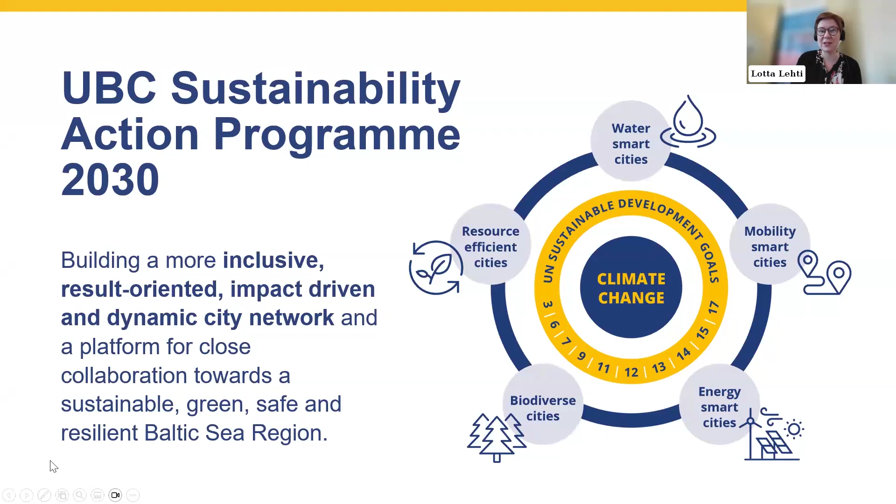Water protection is one of the top priorities identified in our Sustainability Action Programme. And it's with this priority in mind that we have built this project called EMPEREST. I will now tell you a bit about the project, which is the focus of our webinar. The aim of this project is to reduce the amount of organic micropollutants in the water cycle.

What we do is apply what we call a holistic approach to the elimination of micropollutants, especially PFAS. PFAS are the forever chemicals used in, for instance, Gore-Tex and Teflon. Our first activity strand focuses on mapping the current situation of PFAS pollution in the Baltic Sea and the catchment area.

The results are already available on our project website. Secondly, we are building a tool for cities and water utilities for identifying PFAS pollution hotspots in their area and to start mitigating the pollution.

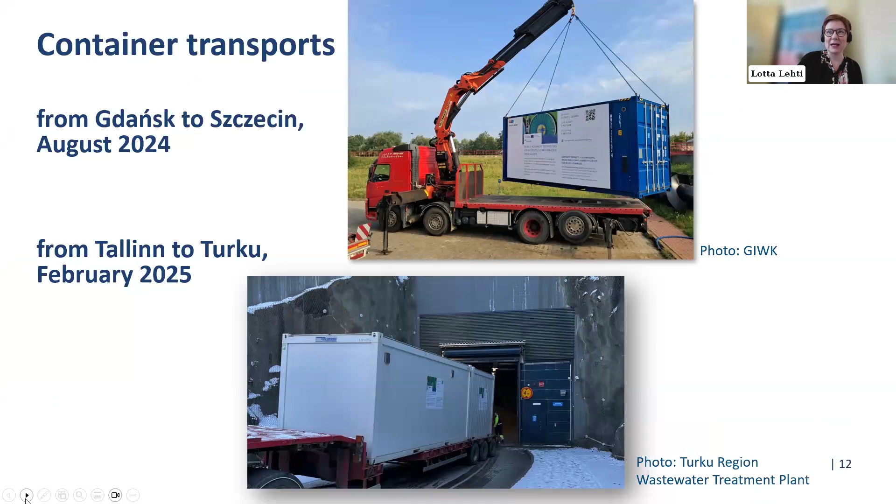And here are some photos of our mobile containers being transported. You will hear more about these containers and what they have inside them in the presentations that follow. So here is our agenda for today.

First, we have a keynote presentation from the Executive Secretary of Coalition Clean Baltic, Mikhail Durkin. Coalition Clean Baltic is a prominent non-governmental organization protecting the Baltic Sea and uniting different actors in the region. Thank you very much, Mikhail, for agreeing to set the scene for us. What are micropollutants? Why should we worry about them? And what's new on the European regulation level?

After Mikhail's presentation, we will hear from EMPEREST partners. Taavo, Tenno, Marlen, Taggu, Marek Swinarski and Piotr Miakoto will present the EMPEREST mobile containers, testing different wastewater treatment technologies. After that, Vanessa Ingold will tell us about the training materials that we have built in the project. And finally, Mariia Andreeva will tell about the solutions we offer and how you can participate.

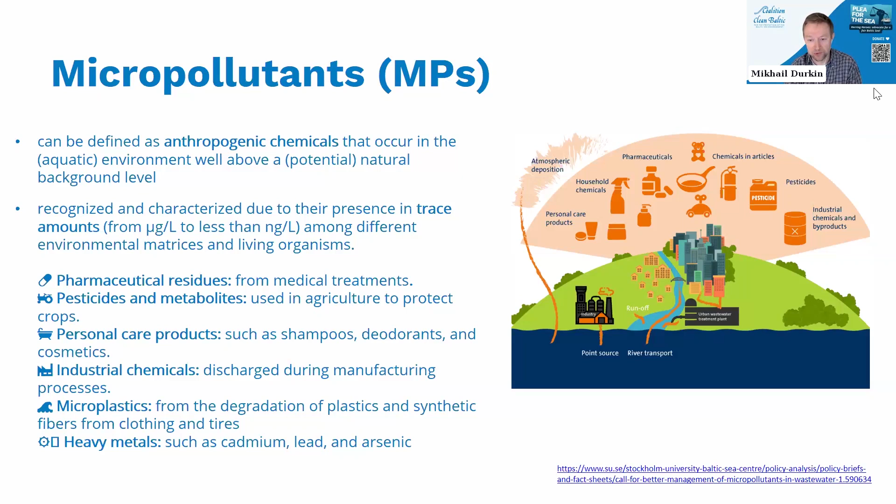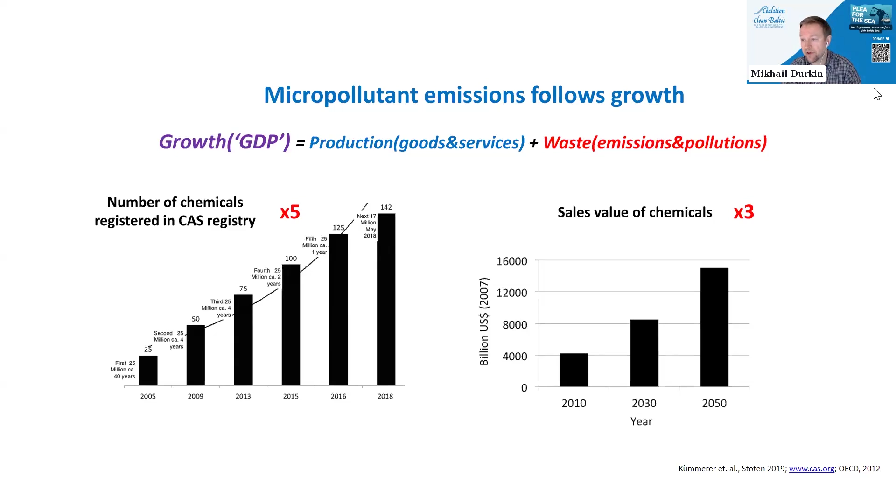What is also important to say, and that is quite an obvious fact, is that the further we develop our society, the more chemicals we have around us, and the more we actually have the problem of micropollutants. So micropollutants follow economic growth. This is demonstrated by these two diagrams: we see the constant increase in the number of chemicals registered in the CAS registry, and we see or foresee the sales value of chemicals being introduced every day, basically.

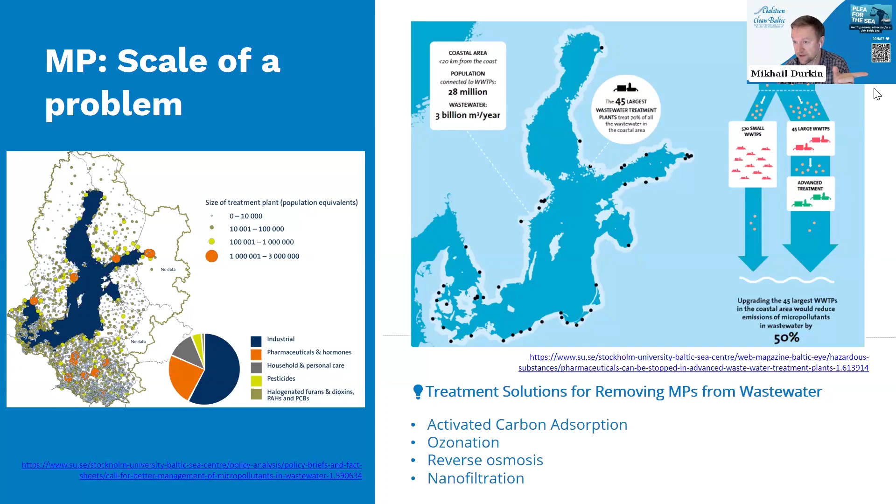Why is it important to address micropollutants? This is also very relevant and valuable piece of knowledge. I also call and draw your attention once again to the various knowledge, competences, and information available from Stockholm University Baltic Sea Center. I've linked here the Baltic Breakfast related to micropollutants in wastewater.

So why does it matter? In general, when you think about micropollutants and all those substances I referred to before, you can basically see several specific environmental impacts, like endocrine disruption, for example, because many micropollutants act as endocrine disruptors. These are not only hormones or pharmaceuticals being discharged, both human and veterinary, but also other kinds, especially persistent organic pollutants, and they affect reproduction and development in aquatic organisms.

The second issue is bioaccumulation. As we all know, many pollutants tend to accumulate in the food chain, endangering aquatic wildlife and predators, including humans, who are at the top of the food chain in many cases. Then the third one is acute and chronic toxicity. Toxic effects can be immediate or long-term, causing malformations, for example, diseases and mortality in sensitive species.

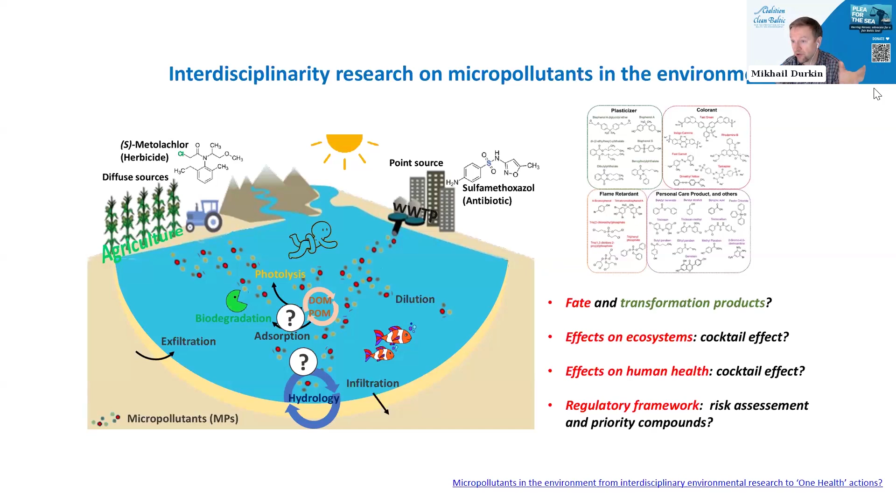Yeah, and then coming to the legislative advances and legislative development—many of you perhaps know and remember Silent Spring. That was a very important book, which was popular, well, I would say perhaps in the 60s, 70s, but also 80s and 90s. At least it was very well pronounced, being one of the bestsellers, generating people to think about environmental situation, environmental conditions, and the need to change.

And that was about pesticides, affecting birds—that an author suddenly realized that there are no singing birds outside. And that actually boomed and boosted the development in the environmental field, leading towards elaboration of respective environmental regulations.

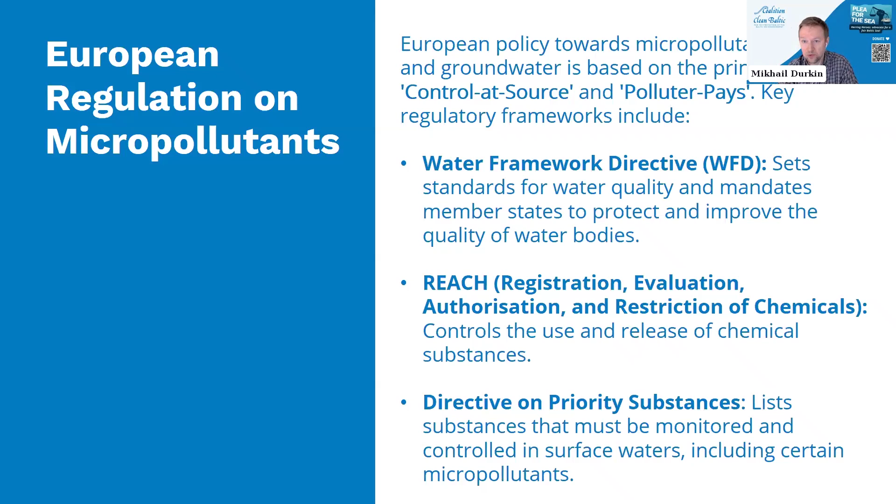But what is also important to remember is that in general, the EU legislation dealing with micropollutants is based on the principles of control at source and the polluter pays principle. And why it is important is that at any point, the polluter should be taken liable for what is discharged. This is also now taken on board in the new development of the Urban Wastewater Treatment Directive.

That is perhaps most important for this webinar, but in general for addressing not only traditional and conventional discharges of various contaminants from urban wastewater treatment plants and municipalities, but also micropollutants. And as many of you know, the directive was revised, updated, and released in November last year, so we have the link here. I will not talk about all of it.

I will only concentrate on what is in it regarding the micropollutants, and that is a very progressive part. In fact, that was very well awaited, and many of the actors dealing with the revision of the directive were coming with their feedback, consultations and asks to the Commission and European Council to really address micropollutants in the revision of the Urban Wastewater Treatment Directive.

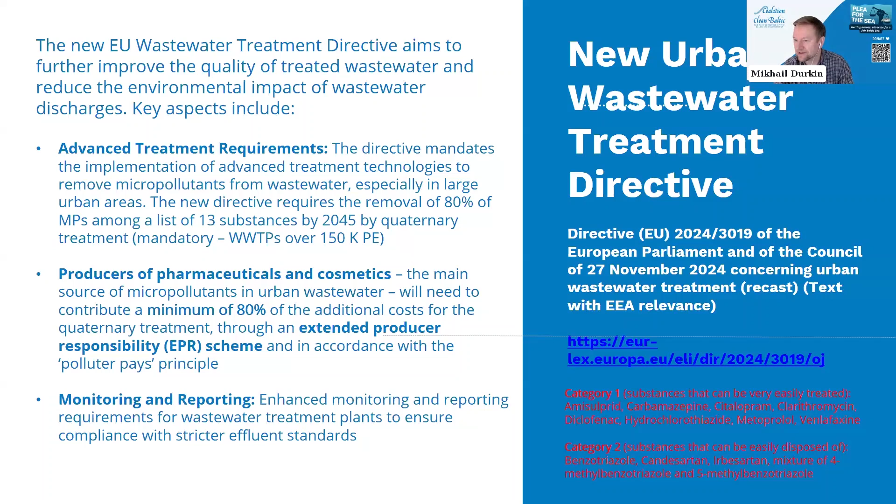I don't actually have time to speak about that, but what's also important to mention is that you do not necessarily need these sophisticated treatment technologies you'll hear about later in the day. What we as civil society have presented is that you can use constructed wetlands as some kind of, if not calling it quaternary treatment, at least an additional tertiary treatment. This is especially relevant for smaller wastewater treatment plants.

What we demonstrated in the study presented to HELCOM already, I think in 2020, is that with constructed wetlands you can also trap micropollutants quite effectively. But again, as I said, I don't have time to go through it.

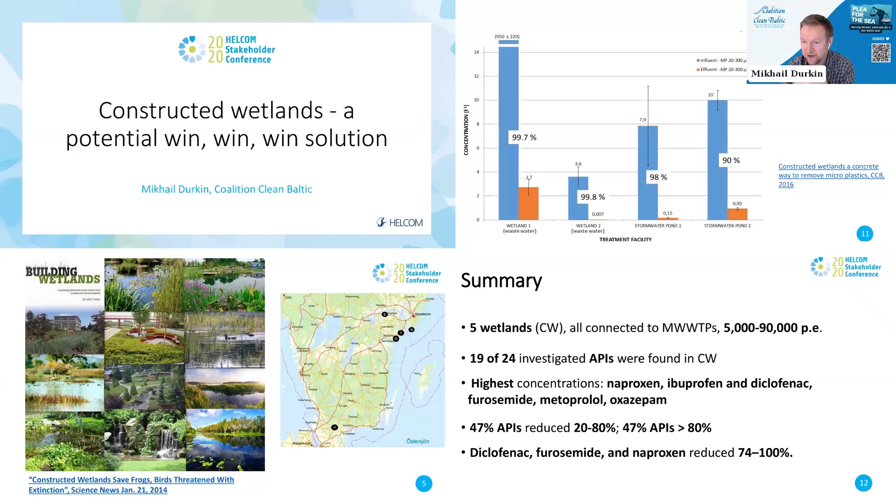Nevertheless, what's also important - we were talking about the Urban Wastewater Treatment Directive and others, and those are unfortunately still end-of-pipe solutions and technologies. What's important is to think about the whole cycle in order to actually address and reduce at source. This is presented in this diagram, which I've taken from another study, and that includes the whole circularity cycle.

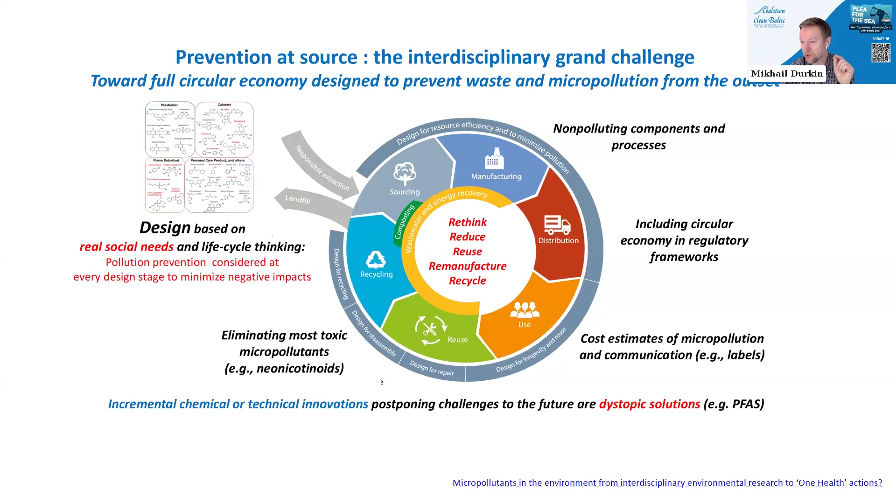So you have to rethink the design of specific articles, for example, to ensure hazardous substances are not included. You have to rethink the whole manufacturing, distribution and use cycle of it. You should, of course, remember designing for recycling and reuse as well. Again, it is important to look not only at the end of pipe, but also at the source. Thank you very much.

I tried to rush it through, and in case you have any questions, you can always reach me out. These are just a few of the hazardous substances projects we are working on and involved in from Coalition Clean Baltic. Thank you very much.

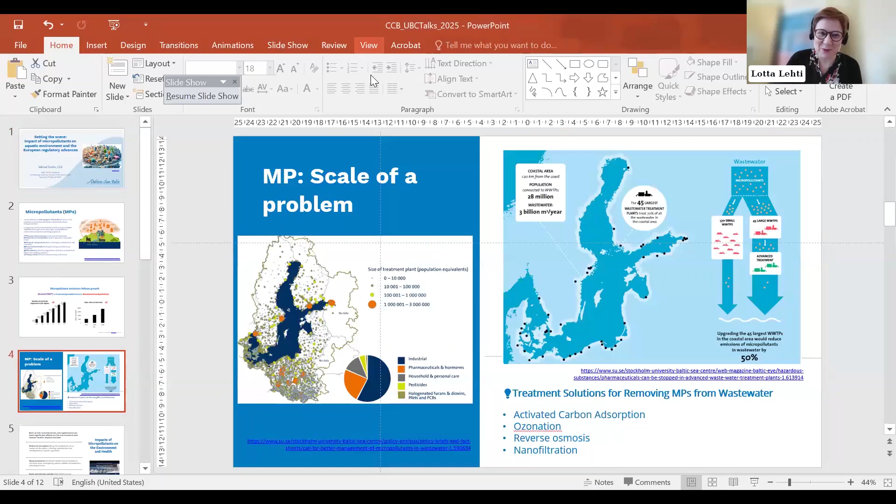You will find a very good snapshot of the situation with wastewater treatment plants in the region that was presented by Stockholm University Baltic Sea Center. We have around 45 large or relatively large wastewater treatment plants located within 20 kilometers coastal area of the Baltic Sea, and they are discharging 70% of all wastewaters to the Baltic Sea. So by addressing even just those 45, that would already improve the situation with the discharge of micropollutants into the Baltic straight away.

But there are plenty of smaller plants. In fact, the revised Urban Wastewater Treatment Directive requires mandatory quaternary treatment for plants over 150,000 population equivalents. The smaller plants, from 10,000 up to 150,000 PEs, are also required to look into introducing quaternary treatment, but based on risk assessment. Especially those located within areas sensitive to micropollutants will have to introduce quaternary treatment as well. I think it is by 2045, as it's a gradual process - 2036 is the previous step, when 65% of all plants should be upgraded, and 2045 is the ultimate deadline.

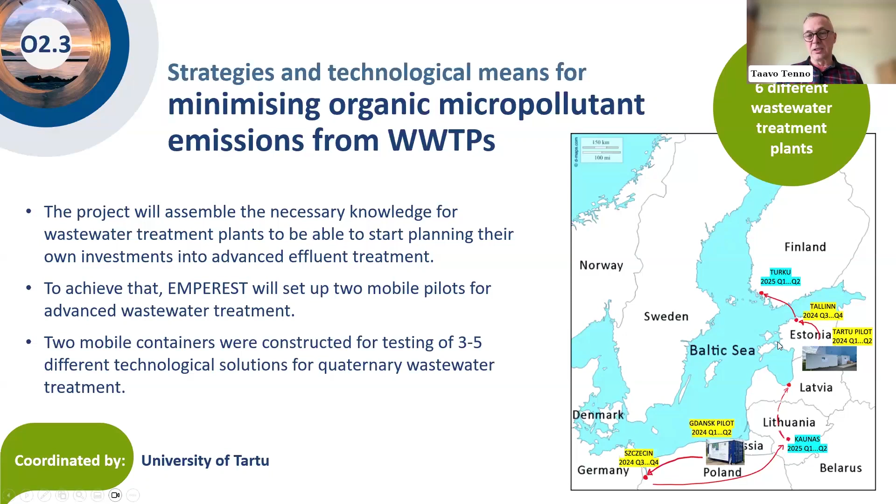That's the reason we are presenting preliminary results, a preliminary view of our project results. So now I'm introducing our speakers who are talking today.

I'm Taavo Tenno, from the university. From Tallinn, Marlen is talking about experiences, and I'll talk a little about the results of Tallinn and Tartu, the pilot plant created in Tartu. The other pilot plant, which was a little different, was constructed in Gdansk, and Marek from Gdansk Water Utilities is talking about the technology of this pilot plant and Gdansk results, and then Piotr will talk about tests done in Szczecin.

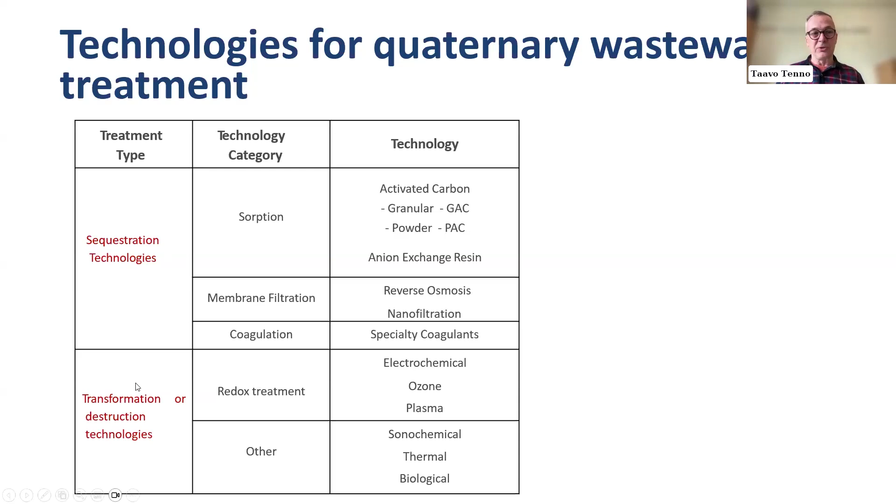So what technologies are there? For quaternary treatment, there are many different technologies proposed at different levels of reliability, categorized as sequestration technologies and transformation technologies. Among sorption technologies, the most prominent is activated carbon. We know activated carbon absorbs different micropollutants, and there are different types with different porosities and so on.

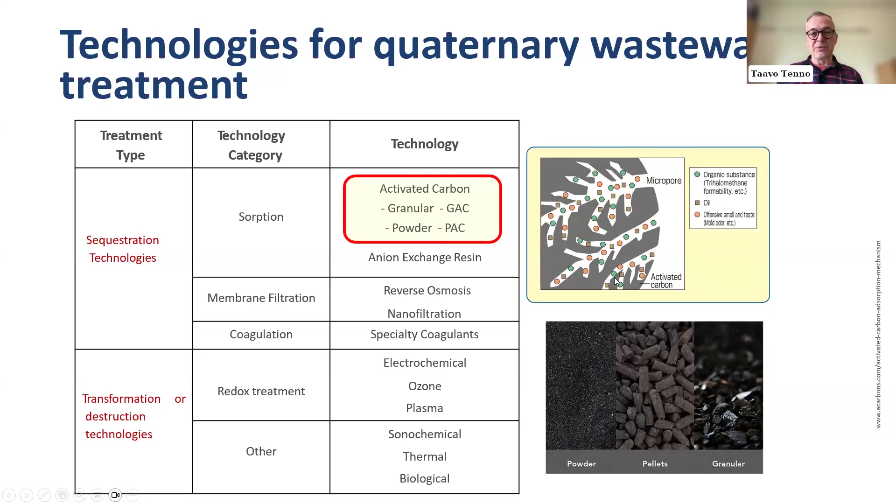In general, there are two different forms: granular activated carbon, which is a big size, normally used as a fixed bed, and a powdered version, which needs to be separated. The main idea is sorption, and it absorbs different chemicals including micropollutants. So finally we have activated carbon filled with those chemicals.

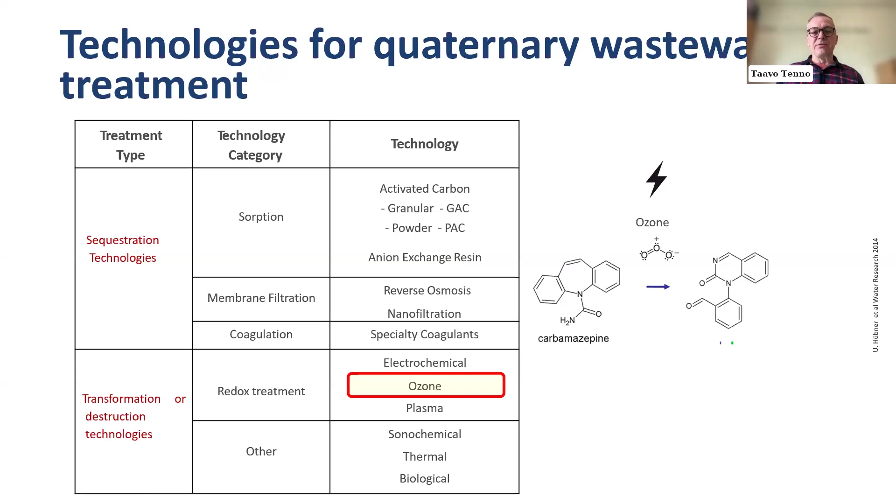For transformation technology, the most abundant and most used is ozonation. Ozone cracks the organic micropollutants, making them more biodegradable or more sorptive. Usually ozone is expensive, so it's not given in a dose that degrades everything, but just makes it more biodegradable or less harmful. It's usually used in combination with some biological activity or with activated carbon, for example.

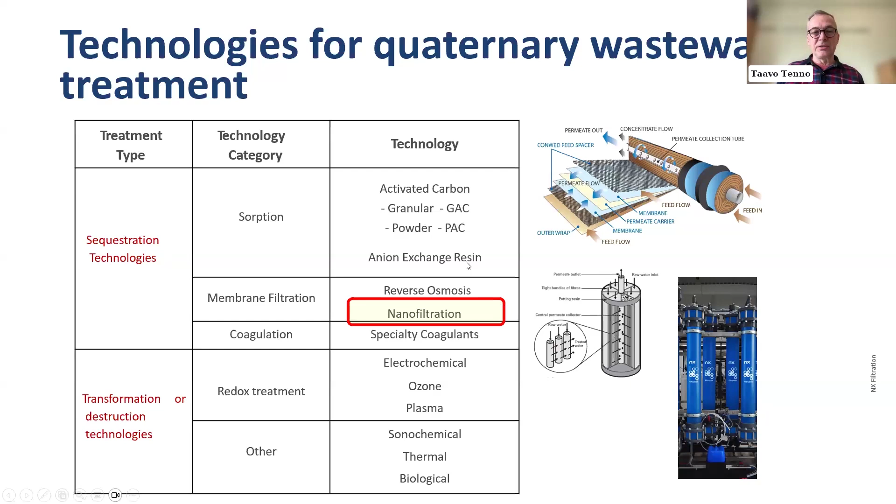There are also other technologies included in the test, like nanofiltration. Nanofiltration is a filter that cuts the size - not as expensive as reverse osmosis, but more directed against PFAS. And also anion exchange resin, which is also towards PFAS removal.

When we compared our pilot plants, granular activated carbon technology was in both pilot plants, and ozonation was in both pilot plants too. There was a little difference though: the Tartu pilot plant also had options for powdered activated carbon and nanofiltration, while the Gdansk treatment plant has anion exchange resin.

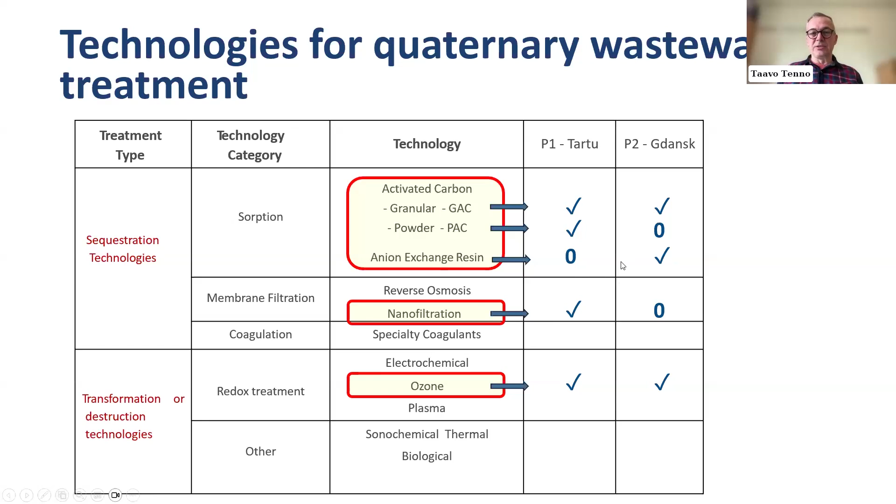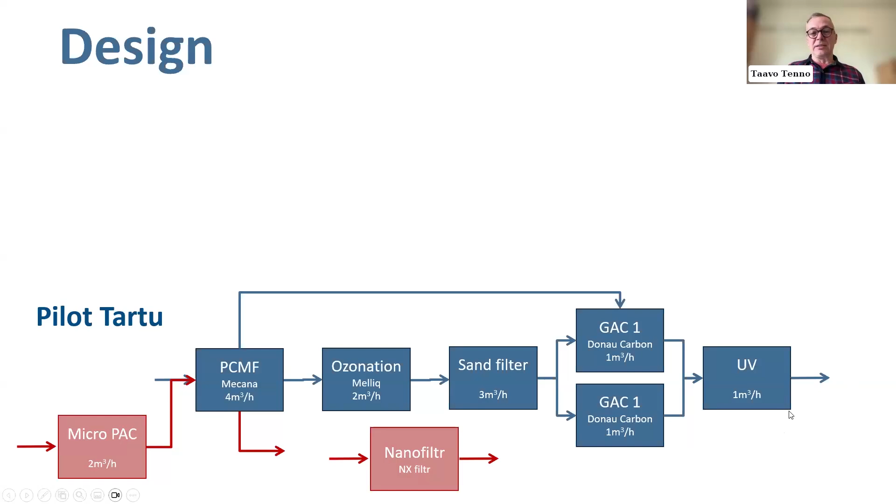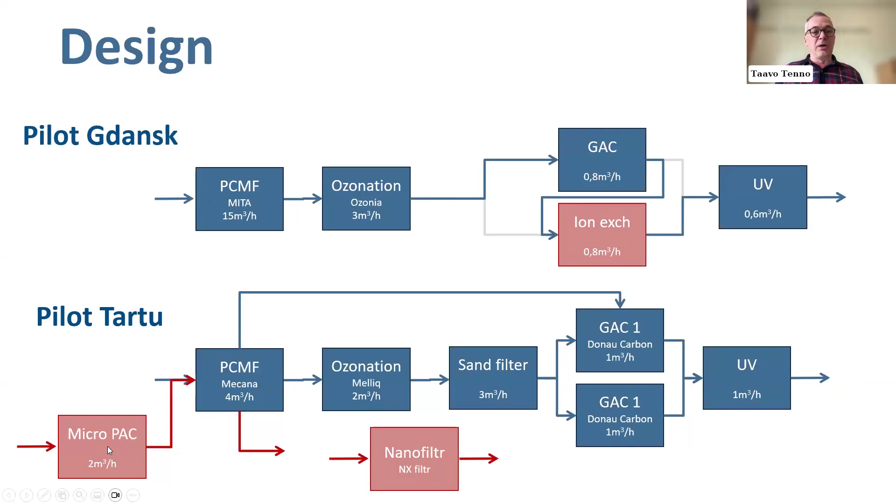A little more about those pilots. There is also a pile cloth media filtration to eliminate all the solids which escape from the final clarifier of those treatment plants, so that we wouldn't lose ozone or activated carbon to solids from the wastewater treatment plant. There is also disinfection at the end of the process. The other pilot had more or less the same parts, including pile cloth media filtration and also UV, but there are some small differences as explained - ion exchange was for Gdansk, and micro powdered activated carbon and nanofiltration was in the Tartu pilot plant.

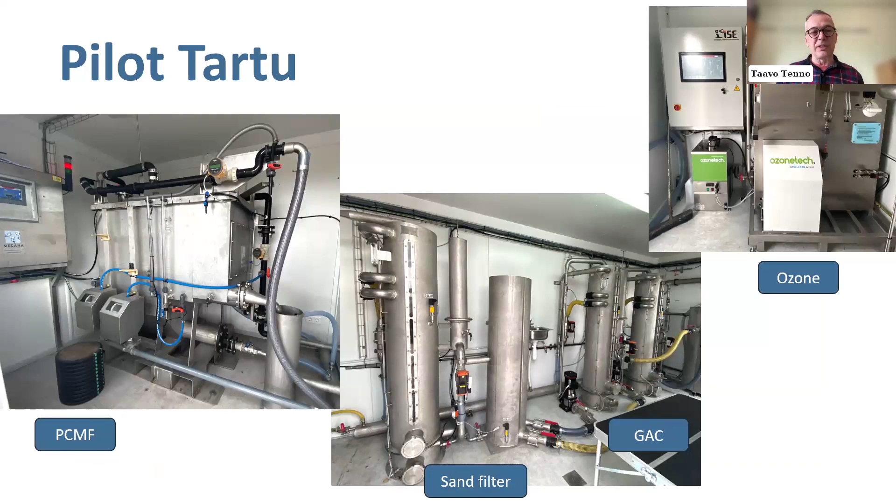This is the Tartu pilot plant. Marek will talk about Gdansk, and now continuing only with Tartu and Tallinn experiments and tests. The pilot is quite technical - it's sufficient to see the effects and shows the efficiency, but it doesn't really show the cost effect, because due to the size factor we cannot really evaluate capex and opex directly based on the pilot.

But to see the really preliminary results, I brought out a few results to make it easier to follow. I chose organic micropollutants: a corrosion inhibitor, benzotriazole, and two drugs, diclofenac and metoprolol, which are anti-inflammatory painkiller and cardiovascular drugs respectively. So you understand what we are talking about. In wastewater treatment plants, those drugs come from hospitals and households.

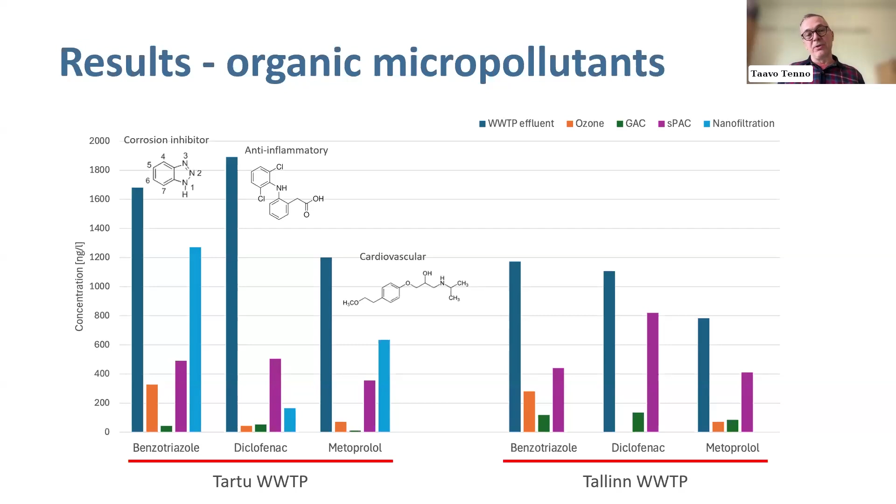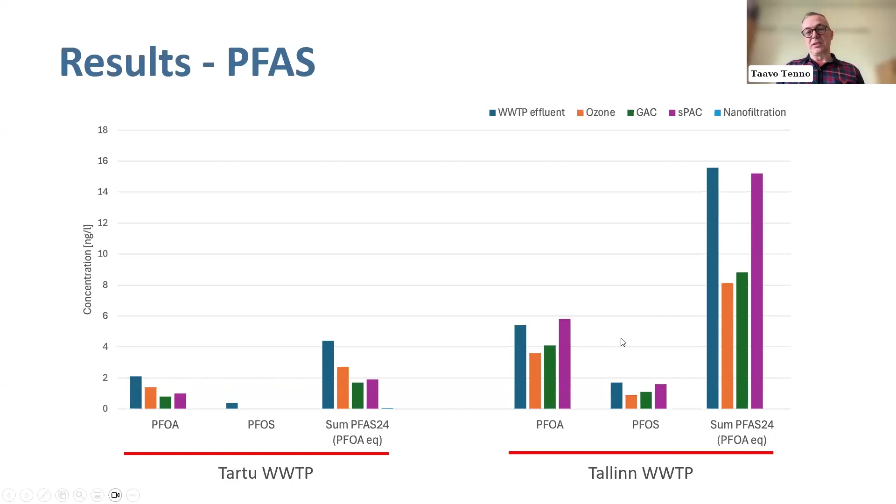And you can see that nanofiltration, which you can not see here, works perfectly - influent high and no effluent. In Tallinn, the results were a little bit different, maybe a bit less potent, but about the same.

So from the conclusions of my part: technologies alone generally work for organic micropollutants, not nanofiltration, out of those which were tested. Sorption technologies have a mild potential effect on PFAS removal, but nanofiltration had a very high effect. Long chain PFAS - I don't show it here - but we observed that long chain PFAS may partially degrade during ozonation, and this should

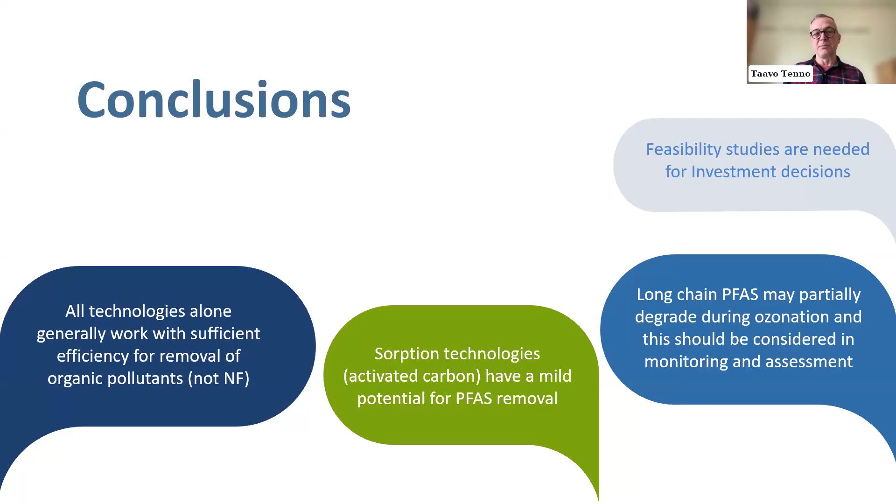be considered in monitoring and assessment - that ozonation affects PFAS too, but it makes it a little trickier to analyze. And we need feasibility studies for investment decisions for those wastewater treatment plants. So this is all from my side.

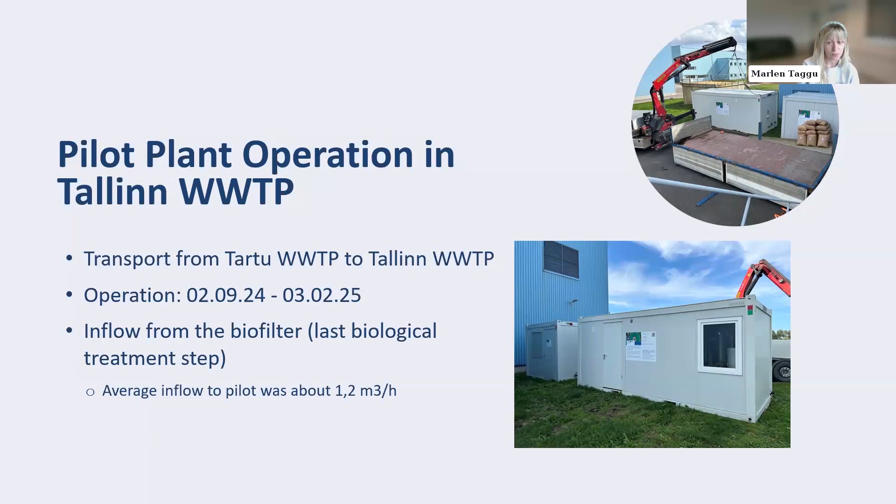When the pilot arrived, we decided that the pilot's influent would be the biofilter in our plant, because the water quality there is already good, since it's the last biological treatment step. In the future, when a fourth treatment stage is added, it will be combined with the water exiting the biofilter. On average, the inflow to the pilot is about 1.2 cubic meters of water per hour. This changed when sPAC arrived, but I will talk about that a little bit later.

A little bit about the treatment process: it begins with a drum filter, which is in a separate container and helps reduce turbidity. This is followed by ozonation, then a sand filter, two granulated activated carbon filters, and also UV.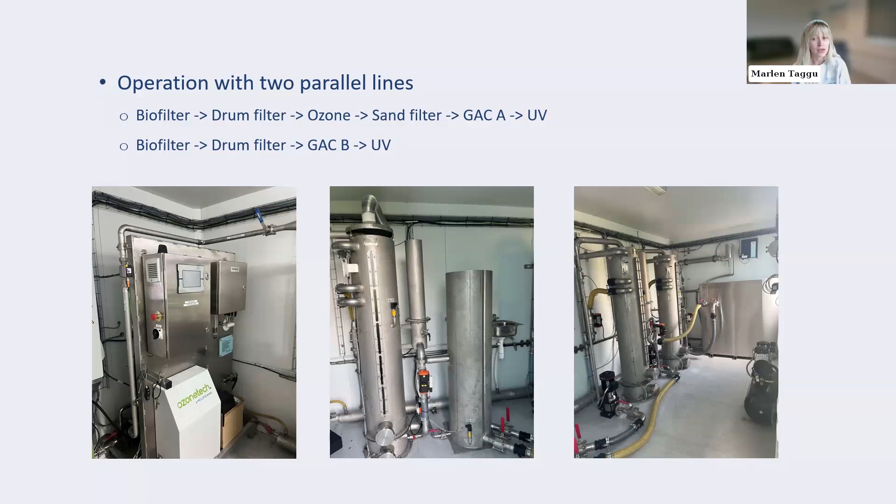Initially, we used two consecutive granulated activated carbon treatment stages, but in November we made a small system modification, connecting one of the carbon filters directly to the drum filter. This adjustment allowed us to create two final sampling points, giving us a better understanding of ozonation effectiveness and whether it's even needed.

In January we had the opportunity to test sPAC, or superfine powdered activated carbon, which we added between the biofilter and drum filter. To do this, we had to prepare a special chemical mixture consisting of water, powdered activated carbon, and our coagulant, which is iron sulfate. Preparing and dosing this mixture was a very dirty task and required a lot of time, and all of my clothes are still dirty from this carbon.

But we completed the SPAC tests in about a week, after which it was sent to Tartu Wastewater Treatment Plant for further testing. In the picture, you can see how the water goes in black and out comes this beautiful clear water.

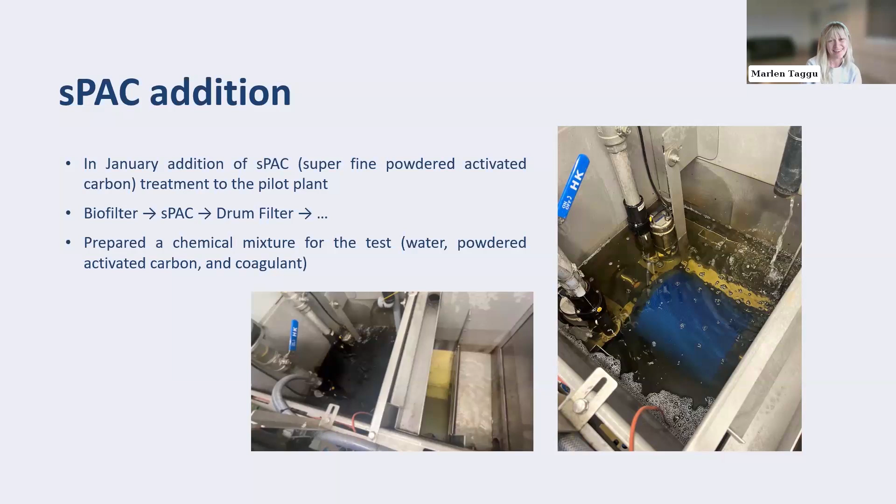Regarding sample collection, the pilot plant itself has an on-site analyzer that takes samples every 15 minutes automatically, which was very helpful for continuously monitoring the pilot's effectiveness. For PFAS and pharmaceutical analysis, we used Eurofins labs. Even before this project started, we had already done PFAS analysis, so we had a pretty good idea which substances were an issue for us. But for pharmaceuticals, this project was very helpful because we didn't have that much data before. So we took a broad approach covering a wide range of compounds, and now we know what to focus on in the future.

And currently, the pilot plant is already, like Taavo said, operating in Turku Wastewater Treatment Plant. I think their sample collection has already begun. So in a few months, it will be very interesting to see how their samples are gonna come out, because Tallinn and Tartu are both outside plants, but Turku is inside, so it's a little bit different, but hopefully we'll hear some good news.

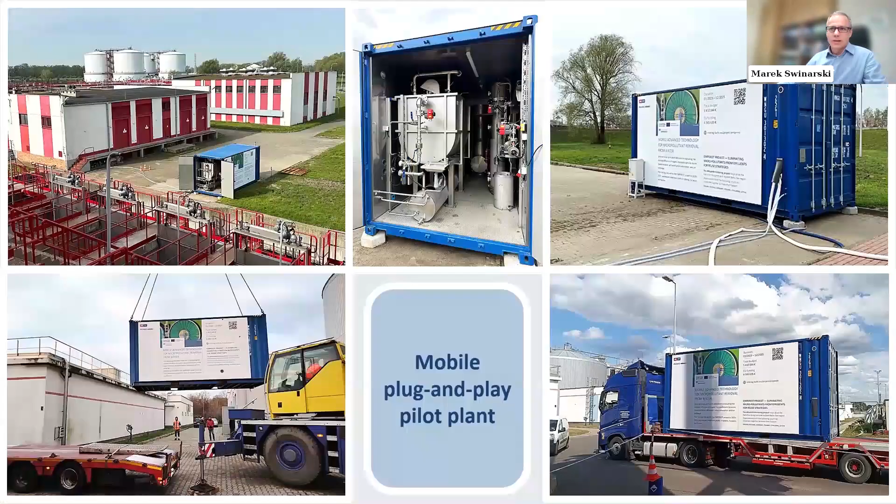I'm very pleased I can tell you a few words about the pilot plant which was constructed by the company I work for, Gdansk Water Utilities, within the EMPEREST project. This semi-technical pilot plant is dedicated to evaluating the removal efficiency of micropollutants from water by advanced treatment technologies. The pilot plant was commissioned almost a year ago, in May 2024. Today, after testing the plant in field conditions during summer and winter, after successful completion of pilot studies at two wastewater treatment plants in Gdansk and Szczecin in Poland, and another trouble-free operation at the Kaunas wastewater treatment plant, I can confidently say that we have developed a state-of-the-art solution. We have developed a tool that can be used by numerous wastewater or water treatment plant operators to evaluate the efficiency of micropollutant removal by means of advanced treatment processes.

I want to say that this success would not have been possible without excellent cooperation with the contractor, Probico Aqua Company, during the whole construction time of this pilot plant.

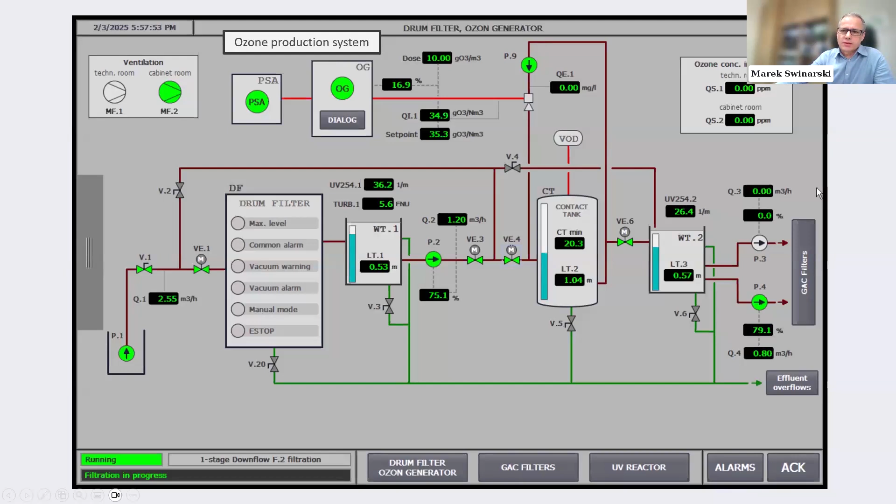This is the view of the control panel, showing the first part of the process train consisting of the suspended solids removal system and the ozone oxidation system. Suspended solids are removed in the Mita cloth drum filter with a maximum capacity of 20 cubic meters per hour.

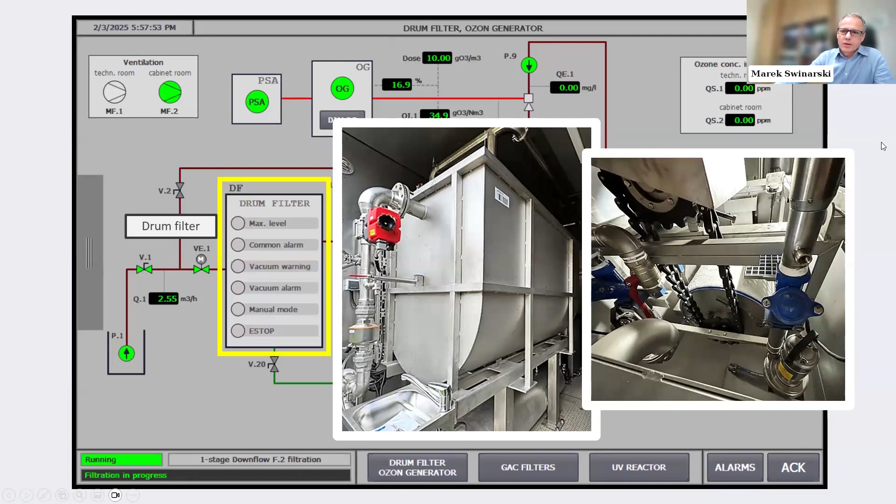Ozone is produced on site from ambient air using the Pro-O2 oxygen concentrator and the Ozonia compact ozone generator, with nominal ozone production of 55 grams per hour.

The oxidation process takes place in the contact tank with a maximum working volume of 800 liters. The working volume of the tank is adjustable, allowing for contact time settings from 15 to 40 minutes.

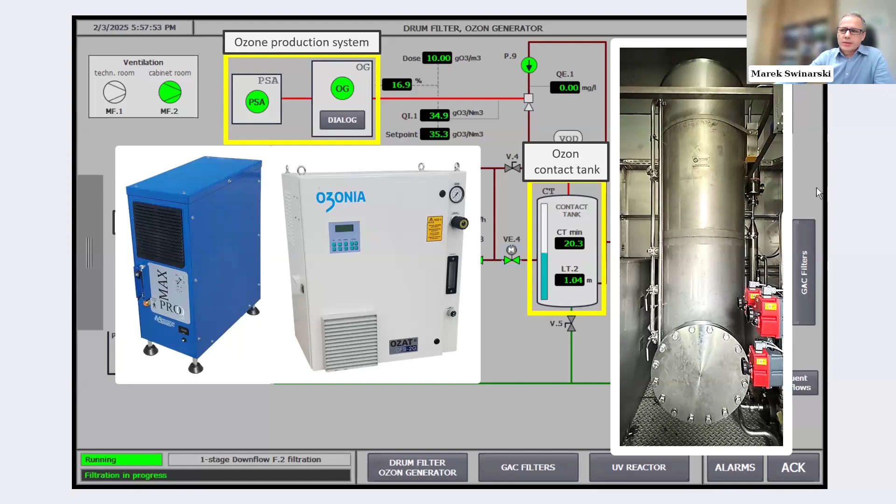Ozone is dosed to wastewater via injector into the recirculation loop of the contact tank, based on the set ozone dose and wastewater flow rate.

This slide shows the remaining part of the process train, consisting of 2 gravity granular media filters of 35 centimeters diameter, which can be filled with various types of filter media. The filters can be operated in parallel or in series.

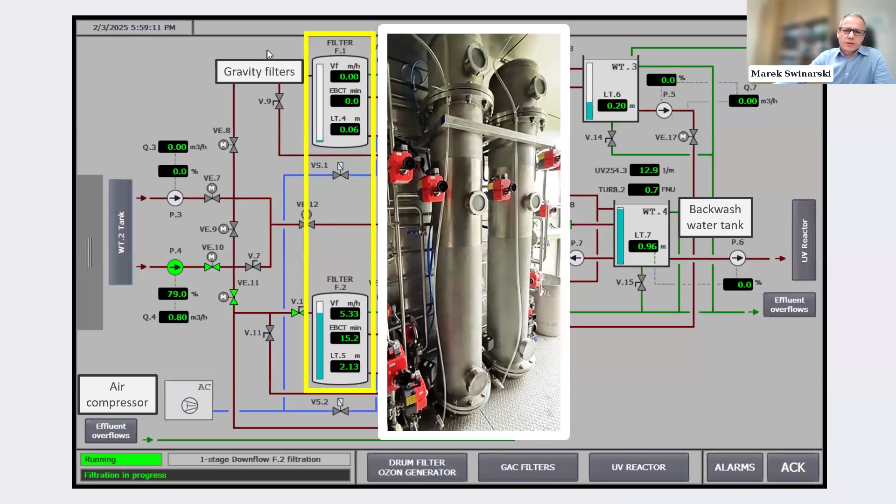The filters are backwashed with treated wastewater using the backwash pump and with air using the air compressor. The backwashing process is carried out in the same way as it is in full-scale facilities.

The last part of the process train is the Probico Aqua UV lamp, with maximum flow of 700 liters per hour and UV dose of 400 joules per square meter at 60% UV transmittance.

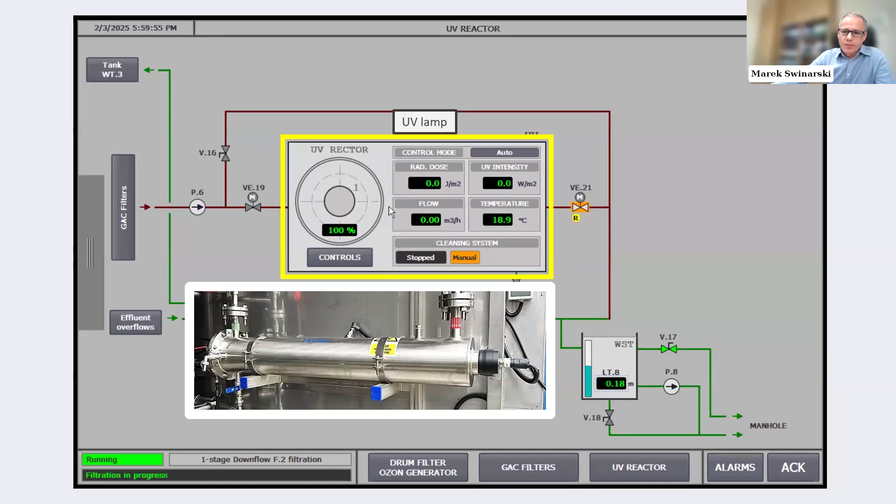The pilot plant is equipped with several online measuring instruments: the BMT ozone analyzer to measure ozone concentration in gas produced by the ozone generator. This analyzer allows for automatic control of ozone dose to wastewater.

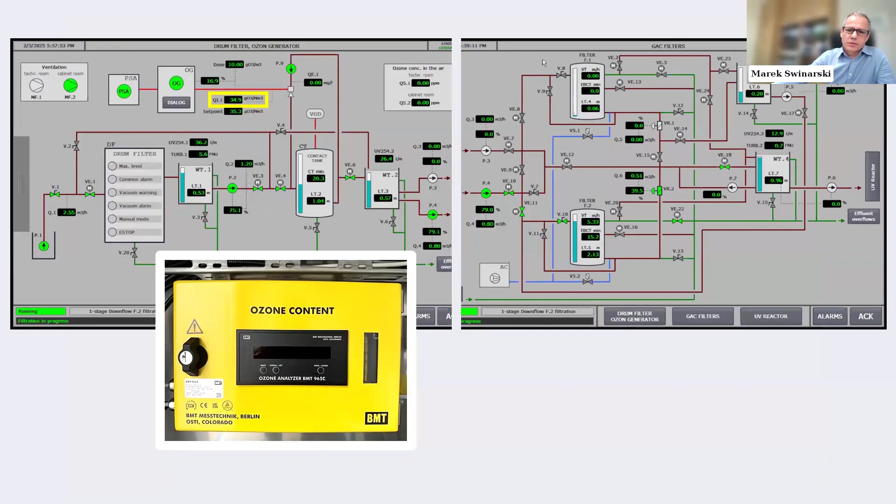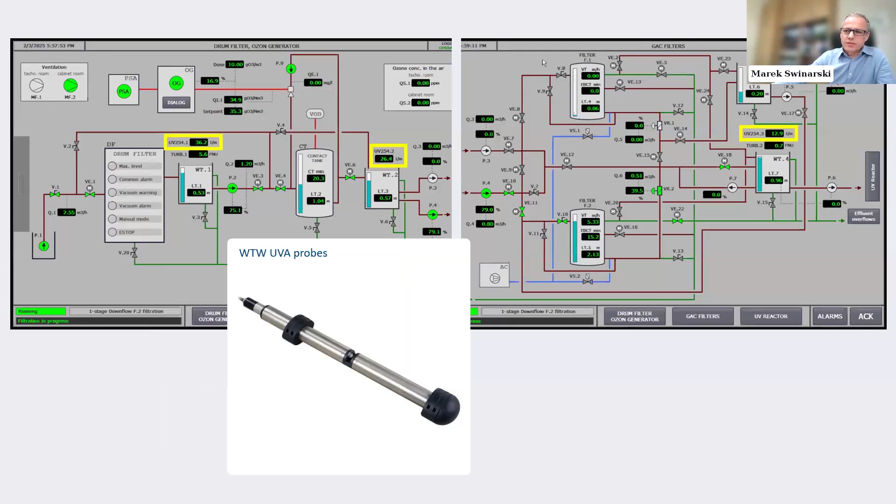The Evoqua ozone analyzer measures ozone concentration in water in the effluent of the ozone contact tank. There are also 3 online WTW UV absorbance probes in the effluent of the drum filter, ozone contact tank effluent, and granular media filter effluent.

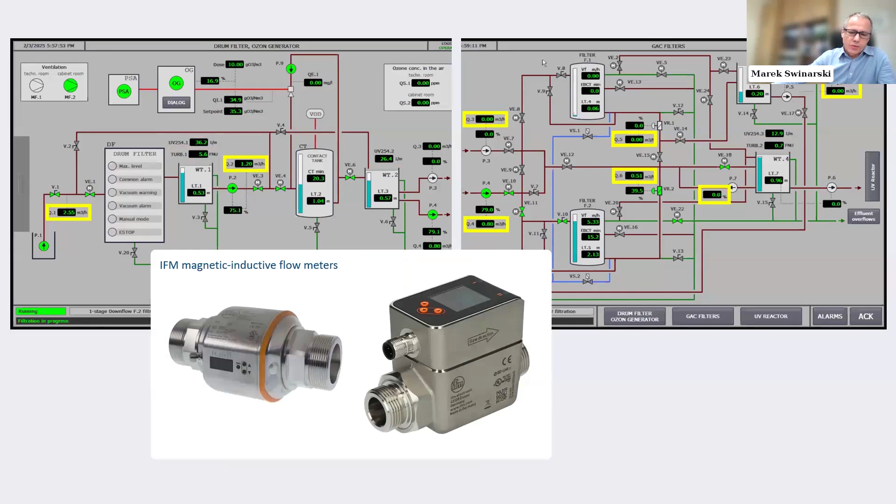And 2 WTW turbidity probes measure the concentration of suspended solids after cloth filtration and granular media filtration. There are also 8 water flow meters, 1 air flow meter, and 8 water level sensors in all process tanks.

A PLC-based control system and human-machine interface enable monitoring and control of the devices and processes within the pilot plant. An on-site router provides secure remote access to the pilot plant over cellular networks.

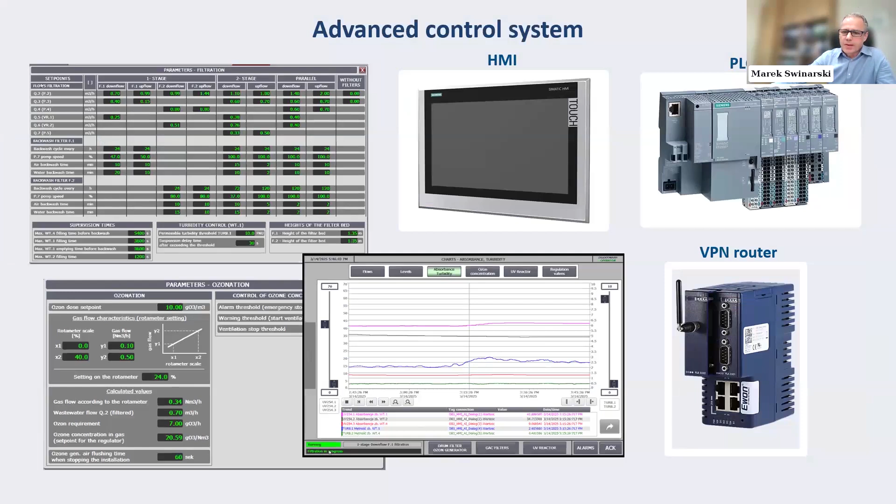Results obtained from the pilot studies can serve as valuable guidelines for designing full-scale quaternary wastewater treatment systems.

This is the end of this very short story about our pilot plant. So thank you very much for your attention.

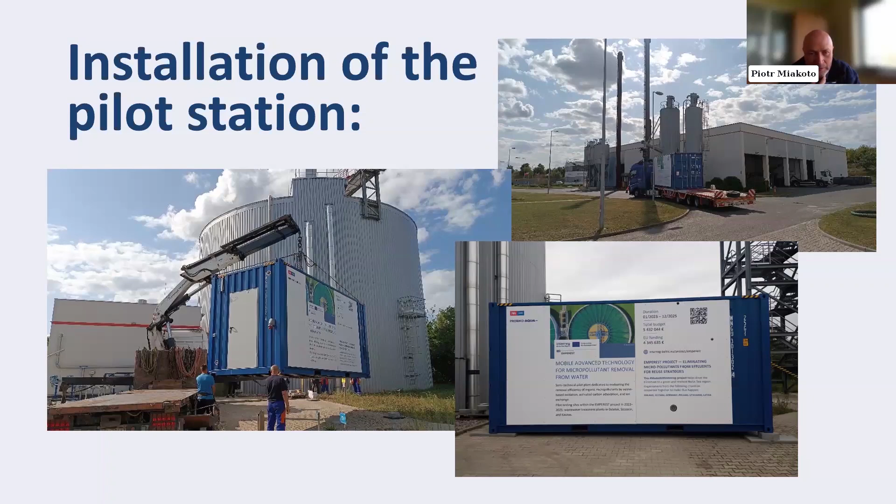We had less than 3 months for the test, so it was a really dense period. We decided to prepare 9 samples, which later became 2 additional ones, during which we tested 2 different granular activated carbons.

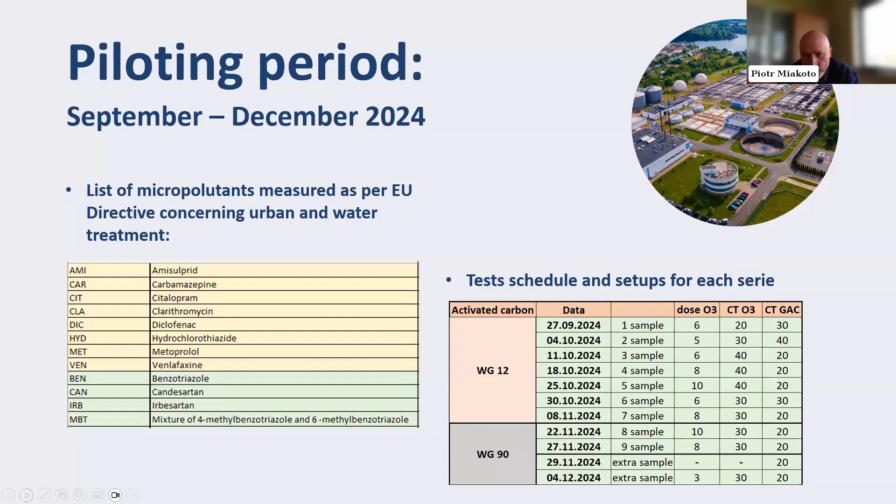In each series of sampling, we applied a different dosage of ozone, different contact time for ozone, and different contact time for GAC. As Marek mentioned, the pilot uses drum filter, ozone, and GAC. It was a very easy and nice experience to operate this.

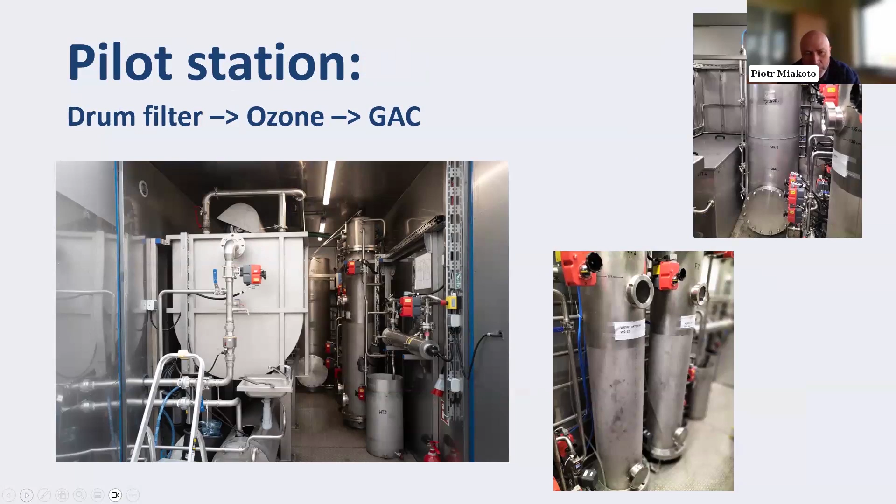So now to the conclusions, the 3 major points. The test of this EMPEREST pilot proved that we actually have the technology for fulfilling the requirements of the EU Wastewater Directive, because it is actually the same technology as we use currently for drinking water.

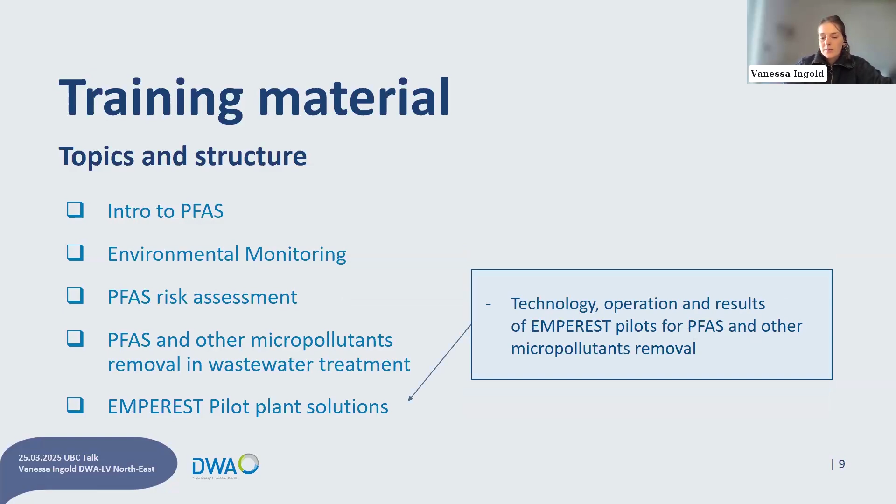I just introduced the structure in a very dry way maybe, but of course these will be videos and very nice and easy to access. This first part is actually already available, so once this webinar is finished, you can just go and look at the Baltic Smart Water Hub and check it out, and give us some feedback on what you think about it, if it's useful.